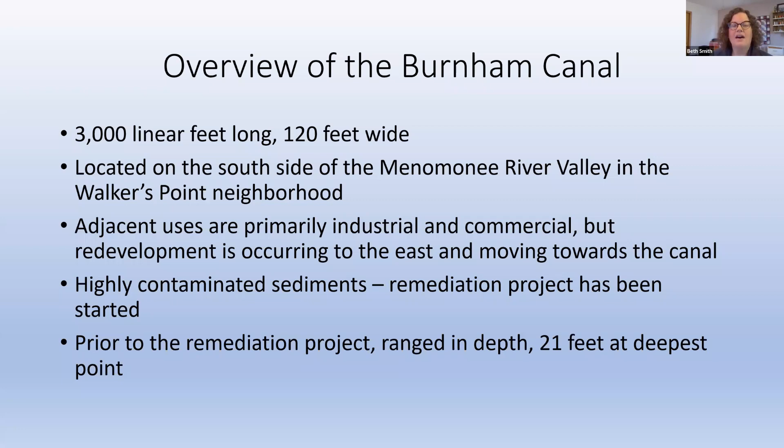The canal has highly contaminated sediments in it, and a remediation project has been started, so that's what I'm going to be talking to you about today. Prior to the remediation project, the depth of the canal ranged from pretty shallow at the west end, maybe 7 feet, to 21 feet at its deepest.

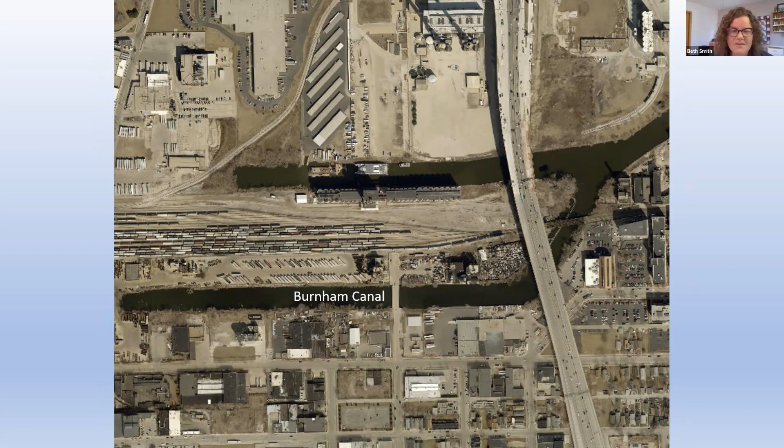So this was in the Menomonee River Valley, and much of the valley was a swamp. It had a rich and diverse natural habitat and was filled with game, fish, wild rice - anything that would go well with a more riverine area. It was generally pristine prior to the settlers arriving, let's say.

Native Americans were settled in this area. And the final 6 miles of the river meandered through the valley before meeting up with the Milwaukee River about a couple hundred feet west of the lake. Then after the confluence, they go out to Lake Michigan.

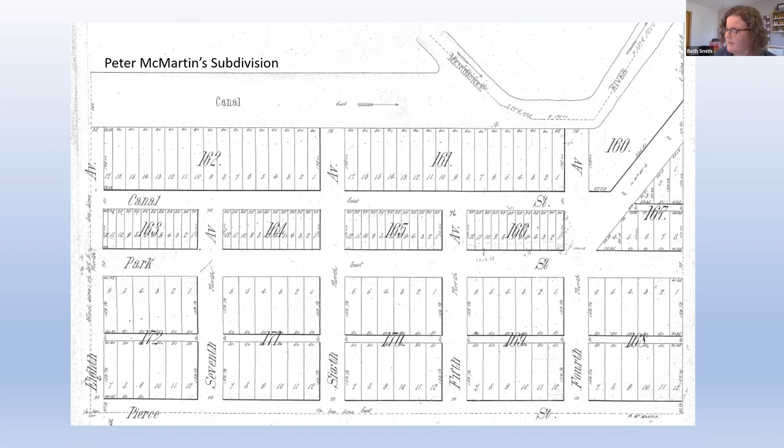Water was a particularly efficient way to transport the bricks because of their weight and mass, and because of the relative lack of roads in the area and the cost of constructing them. It was comparatively easier and cheaper to build canals than roads or railroads. There were occasions where railroad tracks would be laid, and the next morning folks would find they had sunk into the swamp, so they'd have to add more fill and reconstruct the trackage. You didn't have to worry about that as much when dredging a canal.

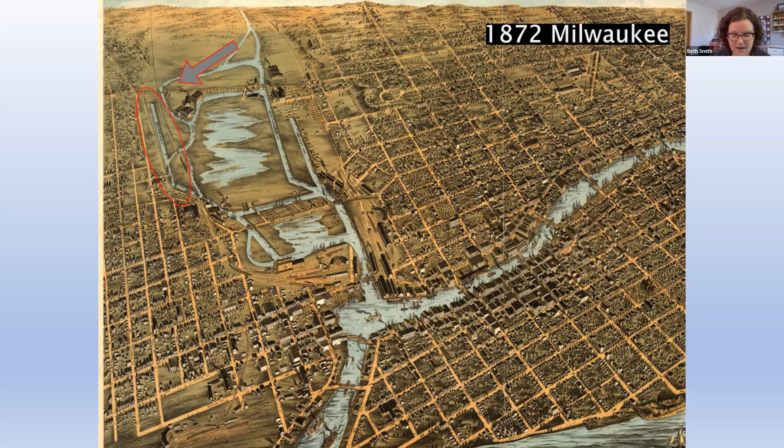So the contamination unfortunately started in this area almost immediately. It didn't take long for the canal to suffer from the commercial activities around it. The adjacent uses included the Pfister and Vogel Tannery, one of the Pabst breweries, a distillery, slaughterhouses, lumber yards, and similar uses. So the canal was used not only to get products to and from market, but as a dumping ground as well. Wastes dumped included spent grain, manure, sawdust, and other organic wastes.

The canal had no natural water source upstream to carry garbage downstream, so what was dumped didn't go very far. In 1874, just two years into use, newspaper reports described the South Menomonee—of which the Burnham Canal is considered part—as having a sickening atmosphere with an intolerable stench of its waters. A city inspector was sent to investigate and found the water thick, inky, putrid, and in a state of violent commotion. By the 1880s, things had not much improved.

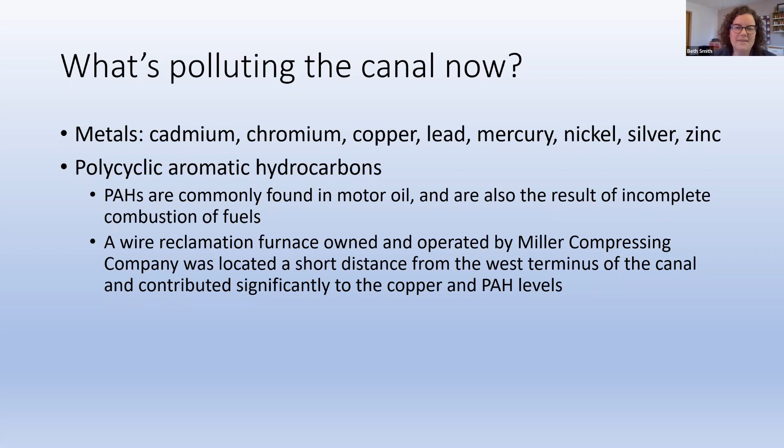So what's all in the canal now? Through testing, we've learned there are heavy metals, including cadmium, chromium, copper, mercury, silver, zinc — kind of all the bad ones. There are also PAHs, polycyclic aromatic hydrocarbons, commonly found in motor oil, also the result of incomplete combustion of fuels. A wire reclamation furnace owned and operated by Miller Compressing, one of the adjacent owners, was located a short distance from the west terminus of the canal, and contributed significantly to the copper and PAH levels in that western end.

So why are these harmful? These contaminants are a harm to benthos, the flora and fauna found on the bottom or bottom sediments of a body of water. I'm pretty sure it was the benthos causing the violent commotion and churning, because they were eating the organic runoff from back in the 1800s, since their food sources are algae and organic runoff. So in a way, they were helping to clean up the mess early on. Larger organisms feed on benthos. But because of the low oxygen levels and the contaminants, the benthos is damaged in the canal, so we basically see it as a dead zone.

Now, what I found interesting is there was a statement in one of the reports that the Burnham Canal is not considered a harm to public health. But reading more about that, the reason is because it's not really being used by the public — so it's not considered a harm because it's not being used. I think if people were going down there and swimming or actually accessing the canal, they would probably find it to be more of a harm to public health.

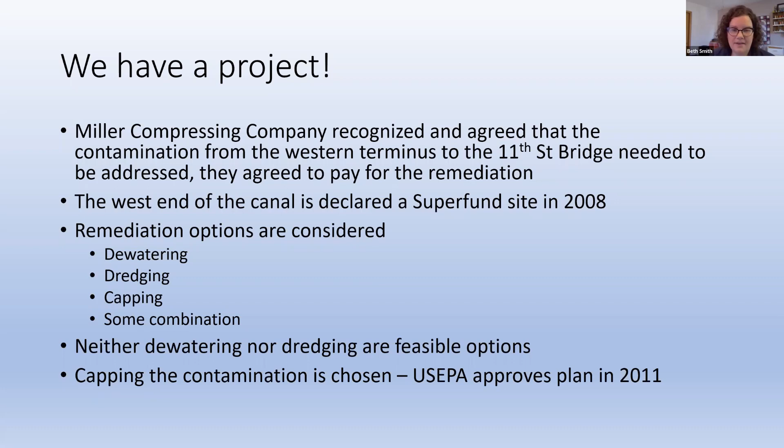An area of concern is defined as a geographic area designated by the parties, in this case US and Canada, because these are AOCs associated with the Great Lakes, where significant impairment of beneficial uses has occurred as a result of human activities at the local level.

The Burnham Canal is part of that AOC. MMSD and partners too numerous to list are committed to doing what's necessary to clean up the AOC. So as part of the AOC cleanup effort planning process, MMSD proposed a second project: to cap the segment of the canal from 11th Street Bridge to the east, and then ultimately construct a wetland over the entire capped canal.

Just a few more details about the chosen alternative. The plan is to place clean fill over the top of the contaminated sediments. The cap ranges in depth because the depth of the canal ranges.

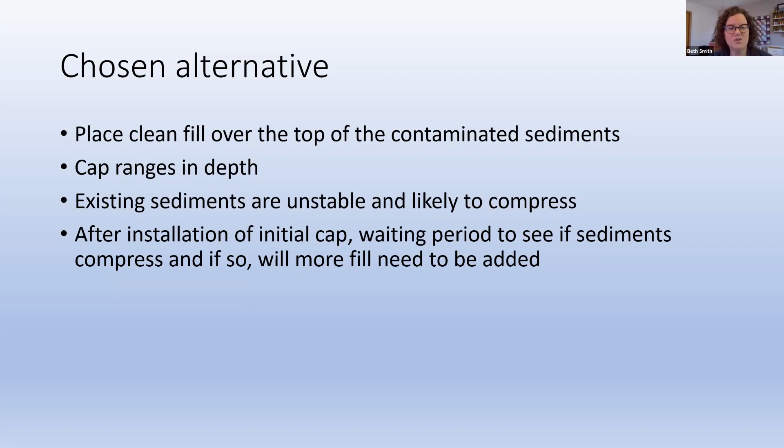So after the installation of the initial cap, and the caps have been installed, I'll talk about that in a minute, we're now in a waiting period to see if the sediments compress, and if so, whether we'll need to add a little more fill before constructing the proposed wetland.

A little information about the real estate acquisition work. I have a schematic here. Miller Compressing handled acquiring the real estate needs for their cap. This is the 11th Street Bridge, so they handled everything west of there.

MMSD's section runs from the 11th Street Bridge to essentially the high-rise bridge of I-94, I-43. This was the conceptual idea for how we would provide the construction areas needed to do the wetland base: a 50-foot temporary easement on the south side of the canal, a staging area providing laydown room for the contractor, and a 10-foot easement along the rest of the north side of the canal.

We had an earlier phase of real estate that required us to do some groundwork for the DNR's requirements for putting the fill in the canal.

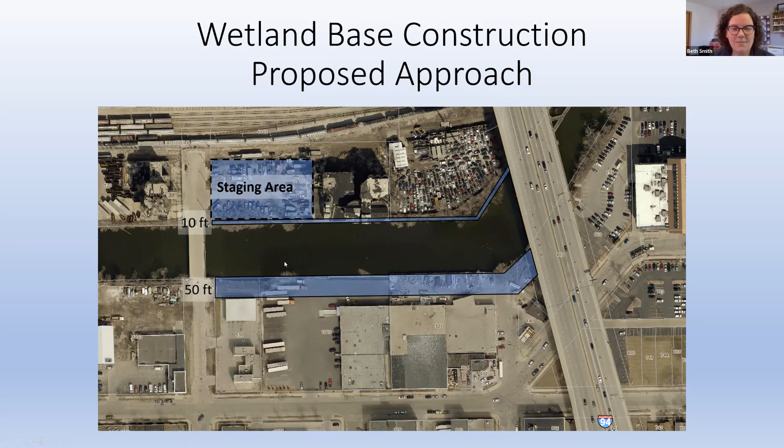And so in that, we did end up—I'm going to skip ahead. So here's the right-of-way plat, which is a little different than how the lines were drawn on the conceptual plan.

Essentially what we did was revise the temporary easements on these two properties—parcel 3 and parcel 2. If we had acquired that original 50-foot easement, it would have wiped out an entire outside storage area for one property owner and eliminated access to semi bays and truck bays on the north side of this property. After quite a bit of back and forth with the designers, we got those changes made, and everybody was agreeable, which we were very relieved about.

We also needed to acquire some limited water rights, and I'll talk more at length about that in a minute. Lastly, we had a temporary relocation of this business here, and also a property management issue.

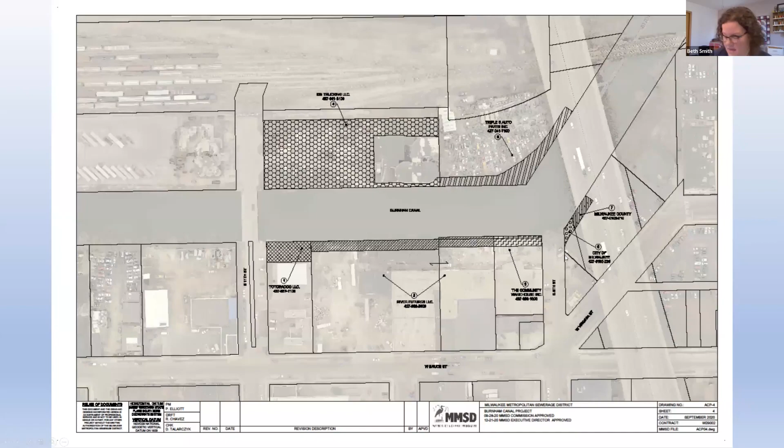So one thing we wound up dealing with on this project, which I'd dealt with conceptually before but not in practice, is the idea of navigability and water rights and that kind of thing.

This is a map of the Burnham Canal, the South Menomonee Canal, and the white area with the dotted lines is what's considered a navigable waterway. This is directly from the NOAA website, and it's actually a little out of date, but there wasn't an updated one available.

At one time, the Burnham Canal was actually navigable all the way to the west terminus, and it was able to do that because the bridge here at 11th Street was a swing bridge—it pivoted in the middle so ships were able to get by when it was open. Then in 1984, the city of Milwaukee wanted to replace that swing bridge with a fixed span, so this end of the canal was delisted from the federal navigable waterways list.

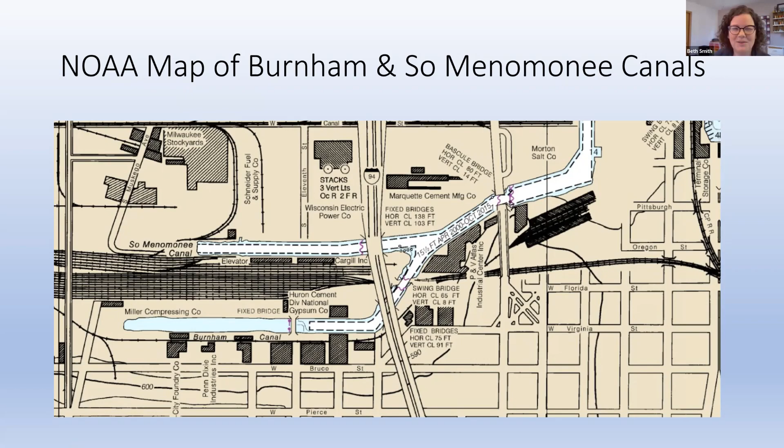So around the 2010 timeframe, it became more and more expensive for the railroad to continue to maintain and safely open the bridge. So what they wanted to do was replace it with a fixed span, the way the city had done at 11th Street. But in order to do that, they needed the property owners between 11th Street and the railroad bridge to sign off on their navigability and water rights to that commercial water-based commerce.

I put the text in here to show that the water rights acquired by Canadian Pacific were not in perpetuity. It reads: the rights granted herein by grantor shall continue in effect only so long as the rail bridge, or subsequent replacement thereof, remains in place and restricts the passage of water traffic beneath it. As used in this paragraph, removal shall mean the elimination of the rail bridge with the intent by grantee not to replace it, and shall not mean the absence of a rail bridge for reasonable periods as may occur during subsequent replacement, maintenance, or reconstruction of the bridge.

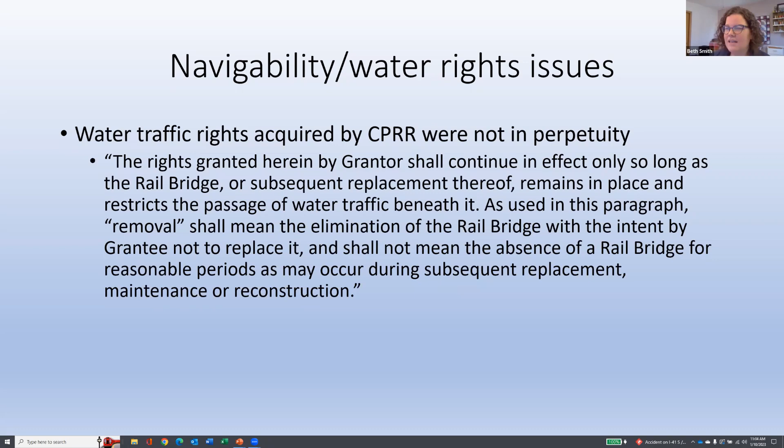So as a result, we needed to acquire that remaining tail end of the water rights that the Canadian Pacific didn't acquire. Those water rights we did acquire in perpetuity.

The wording that we used: grantor agrees to convey and quitclaim to grantee the exclusive right to prevent, prohibit, and exclude the docking or interchange with water vessels along that portion of property abutting the Burnham Canal in the event the Soo Line Railroad, Soo Line was the railroad acquired by Canadian Pacific, on the east end of the canal is removed. The granting of these rights is perpetual.

So by having everybody sign off on that, we now own those rights, so we don't have to worry that by filling the canal, someone is going to come later and say you've deprived me of that stick in the bundle.

What I was also grateful for is that everybody recognized that the unlikeliness of that railroad bridge being removed meant there was not a lot of money tied to those rights we needed to acquire, and we were able to acquire them for a nominal amount.

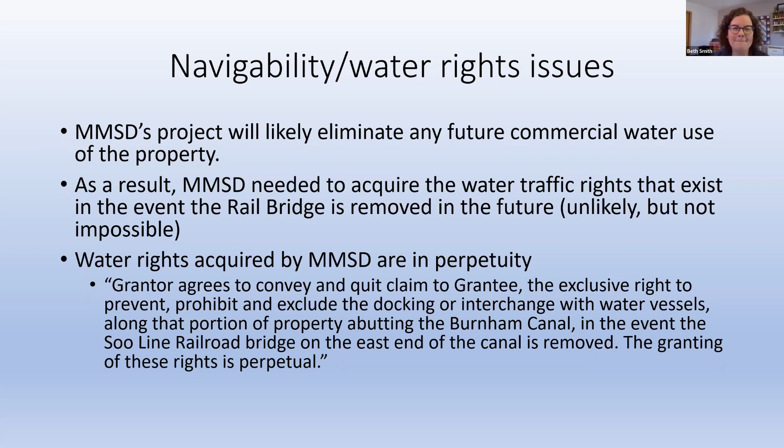Okay, so we've gotten the real estate acquired and we can move on to construction. Here's the overview of who handled what areas of construction, and this is for placing the cap.

The west section of the canal here was completed by Miller Compressing in 2021. And then the east section here was done by MMSD, who mobilized in spring of last year and completed the work in October.

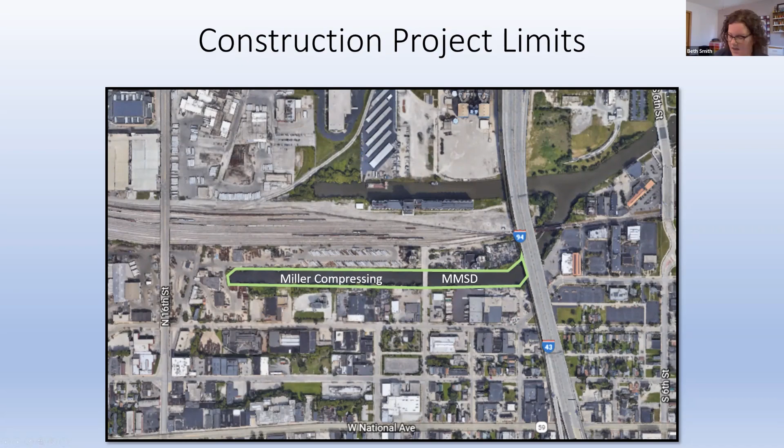About three weeks after I took these pictures, I got a call from Megan Dressel, the construction project manager, telling me that divers had found a boat, a sunken boat, in the canal. And I was like, wait a minute Megan, what? They found what?

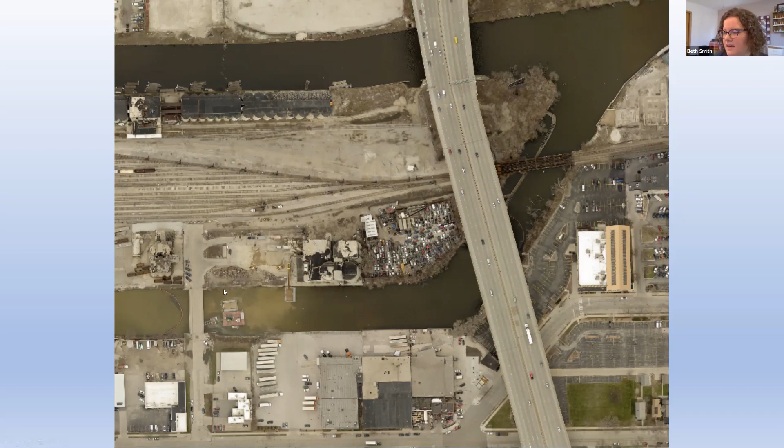I've added these slides last minute because a friend of mine who I ran through this with said, tell me more about the construction, how did you guys make that happen? So this is an aerial overview of the canal when the work was underway. You can see we've got some operations going on here and here, and here's a zoomed in view so you can see it a little bit better.

Essentially what the contractor did is White Lake out of Michigan. They operated, so they've got piles of the clean fill here, and then a conveyor that would take them out to put it on a barge. I'm probably using the wrong terminology, so forgive me, anybody who has more maritime knowledge than me.

And then they would drag that barge over to a second barge that had an excavator on it. That excavator would take the clean fill and put it in a hopper here, and this was like a little broadcast conveyor that would sprinkle the fill into the water.

As I understand it, this was all tracked by GPS, so they would know how much fill was being placed in every location.

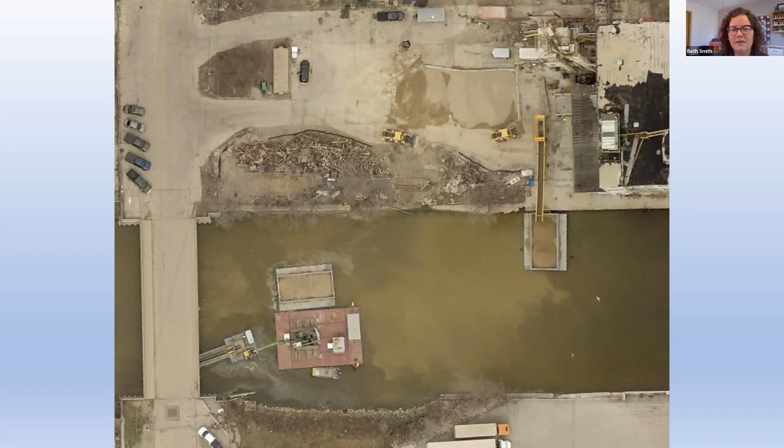Next steps for the project. As I mentioned previously, we believe that those underlying sediments are going to compress, so we're going to be tracking to see if that settling is happening, and if so, how much. Once the cap is stable, which we're hoping will happen within 2 to 5 years, we will begin construction phase 2, which is the Burnham Canal Ecosystem Restoration Project, aka the Future Restored Wetland.

The project will add 6.7 acres of wetland habitat to the Milwaukee area, and the specific wetland goals are to create habitat for northern pike and yellow perch. I don't know if you guys all do Friday fish fries the way we do here in Wisconsin, but yellow perch is my favorite, so there can never be too much yellow perch habitat as far as I'm concerned.

Next, to create varied habitat to benefit other wetland-dependent wildlife, such as turtles, birds, and frogs, and then to create water-based recreational opportunities.

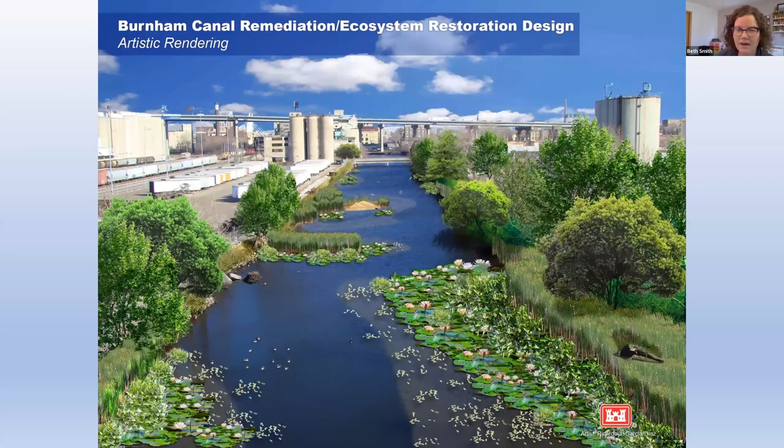So in order to make that wetland project happen, we do have some additional real estate work that we'll need to do. We'll have acquisition of additional real estate rights, temporary construction easements. We're not sure yet what those will look like.

As I understand it, the wetland is in the design process, so once we know what the design is and what the construction needs are, we'll be able to determine what those construction easement needs will be. Then there will be permanent easements for maintenance access, and some permanent conservation protection, either via deed restriction or conservation easements. Not quite sure just yet.

So thus concludes my presentation. I will stop sharing, and if anyone has questions, I would be happy to do my best to answer them. There's a lot of information in there that's not necessarily mine, so.

Oh my gosh, so quiet. Hey Beth, in your typical role...

How often do you come back to a project after you acquire your rights for your company? It sort of depends. In this case, because the project exists over some years, we would revisit that more often. When we acquire things, especially if we own it in fee, part of my job is to drive around and make sure nobody is illegal dumping. We do have a significant homeless, unsheltered population living in our watercourse right of way. So we end up doing outreach with the county housing authority or housing support services.